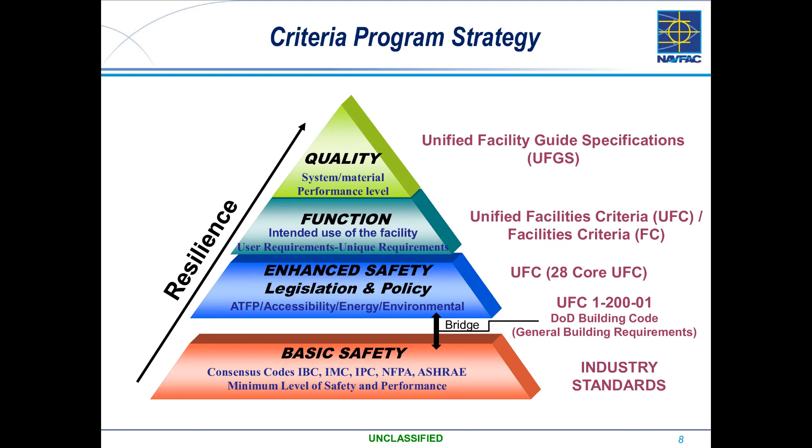The NAVFAC criteria group is part of a tri-service team. We work collaboratively with the Army and Air Force on an installation resiliency function group. This group spearheads some of our resiliency criteria projects across disciplines. Below is a list of our current FY22 and FY23 planned projects.

This next year, we have a significant focus on microgrids for energy resilience. We're about halfway through our microgrid UFC development, and we'll be working on battery storage, controllers, commissioning projects for FY23. Cyber is also a concern we're working on for UFC, which includes the development of a communications facility UFC, which will help make our facilities more resilient.

We are increasing our natural infrastructure criteria through the development of a new UFC that will have a design focus and will be complementary to the climate change planning handbook used by our Navy planners. This effort also involves collaboration with the Army Corps of Engineers Engineering with Nature program.

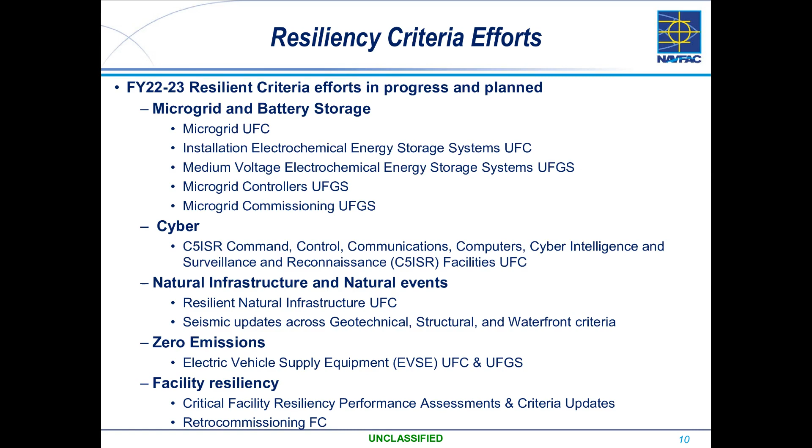Finally, the Navy has an inventory of aging infrastructure. Past events have shown that our aging infrastructure is at greater risk than our newer construction. We have projects in place that will look more deeply into the performance of existing critical facilities and look into ways of increasing resiliency. Next slide, and we're going to go over to the planners.

Good morning, this is Nate Manning at NAVFAC Atlantic. Resiliency and planning criteria. We've had some recent updates to planning criteria in 2 DoD Unified Facilities Criteria documents, specifically UFC 2-100-01 Installation Master Planning or Comprehensive Planning, and also the 05N or Facility Space Planning for Navy and Marine Corps installations.

UFC 2-100-01 Installation Master Planning, 10 U.S. Code 2864, requires master planning for military installations, but also addresses energy and climate resilience, transportation, and installation resilience components of the master plan. The FY20 National Defense Authorization Act requires climate change effects and considerations be built into the master planning process. Per the law, in the military installation resilience component of the master plan, we utilize the NAVFAC Climate Change Planning Handbook for installation adaptation and resilience. The NDAA requires the use of the Department of Defense's Regional Sea Level Rise Database and the DoD Climate Vulnerability Assessment Tool for further climate-related analysis.

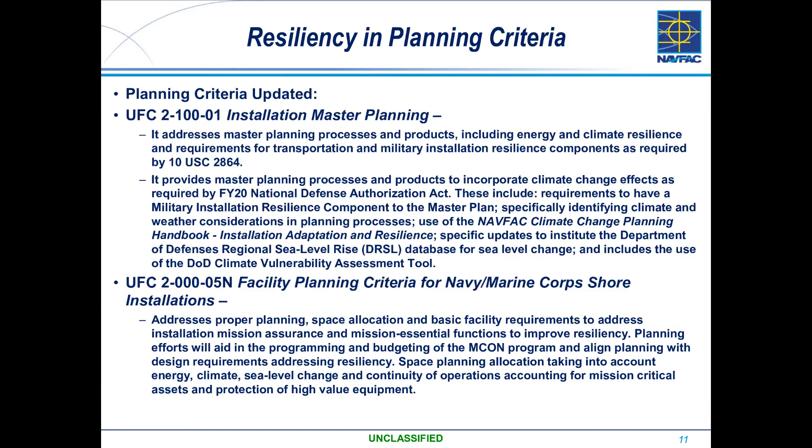In the 05N or Facility Space Planning for Navy and Marine Corps installations, this document addresses the basic facility requirements for mission assurance facilities. Programming projects with resiliency items built into the design protects mission essential assets. Next slide, please.

The DRSL database, or DoD Regionalized Sea Level Change and Extreme Water Level Scenarios, assesses vulnerability and impacts from climate events at locations where DoD has assets currently. The scenarios that are provided are adjusted specifically for each DoD site, so decision makers can make location-specific decisions.

There are 5 scenarios within each time frame: 2035, 2065, and 2100. The end user must go through a series of scenarios to understand any potential change in shoreline or wetland areas. The end user must go through questions like: how impactful is this scenario? What areas are likely to see climate-related implications? And when might it happen?

We are currently developing a decision tree to aid the end user through this process. We also recommend the end user generate maps for sea level rise with storm surge to understand temporary flooding that might occur in a specific location. The DRSL is available currently in data table format. However, NAVFAC is currently transforming the tabular data into GIS to better support decision making.

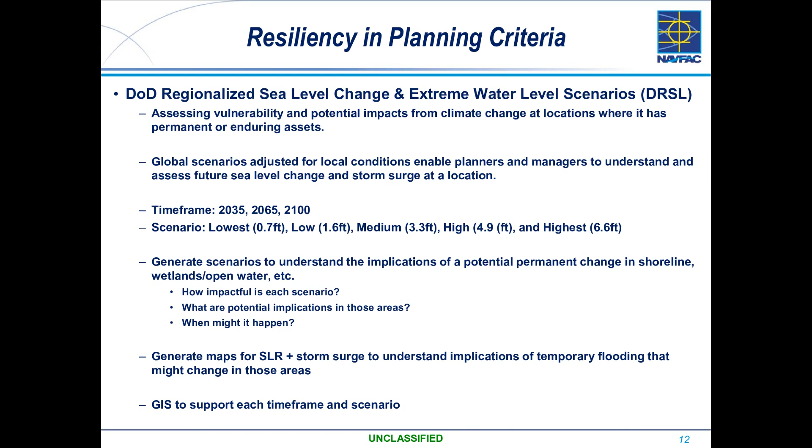Next slide, please. And I'm going to pass it over to Brian Hardman. All right, thank you, Nate.

This is Brian Hardman, and as part of the fiscal year 2020 National Defense Authorization Act, there was the requirement for a new section to be added to the master plan. And the master plan is also called an installation development plan. We do have a consistency guide that goes along with that.

And so those new topics included, for resilience specific: the risk and threats overview, assets and infrastructure, lessons learned, ongoing and planned mitigation projects, outside the installation public or private agreements, and future risk and threats to projects. And so these are all sections that have to be answered by every installation, and it makes them look at what they're doing for these topics and how resilience plays into that.

Next slide, please. And so as it has been mentioned already, there's the Climate Change Planning Handbook, which covers installation adaptation and resilience. This was a 2017 publication that has just recently been given the ability to train the handbook to 8 different regions throughout the world in NAVFAC. And so this is a tool that can be used that shows the impacts on the built and natural infrastructure, and using this planning handbook for the development of tools, looking at adaptation and resilience from that standpoint.

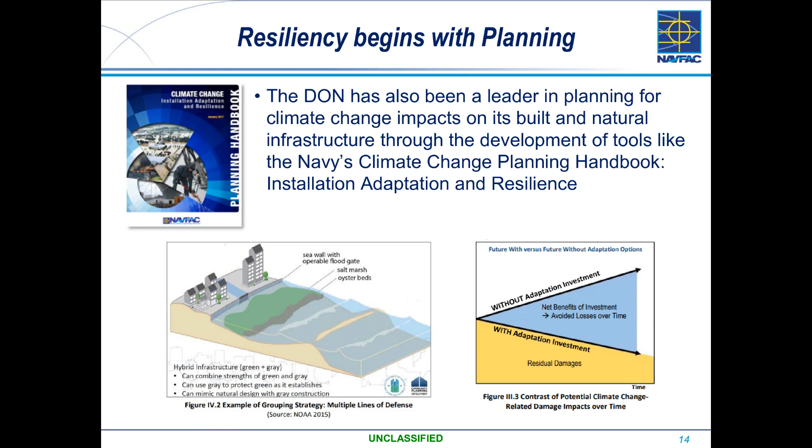Next slide, please. And so as I mentioned, there are 8 trainings located worldwide, and those trainings will be done in 4 stages because the handbook is in 4 stages. So the first one is establish scope and characterize impacts. Stage 2 is identify and screen action alternatives. Stage 3 is calculate benefits and costs of action alternatives. Stage 4 is assemble a portfolio of action alternatives.

And along with that, the appendices also include some topics such as adaptation action alternatives fact sheets. And so those go into a deeper dive into structural adaptation approaches, natural and nature-based adaptation approaches, facility adaptation approaches, and non-facility adaptation approaches.

Then there's another one that talks about the economic analysis tools and resources fact sheets. There are worksheets that every student who goes through the training works through. They all come together and decide what scenario they're going to look at as a group, and the worksheet then goes through stage 1, 2, 3, and 4, so you're able to have an idea of what's going on.

This is helpful when you're planning projects such as MILCONs, because when you're looking at a proposed project, how can the climate change planning handbook play into an alternative? Here's the worksheet that moves you through stage 1 through 4, and you can then have another assessment for that MILCON project.

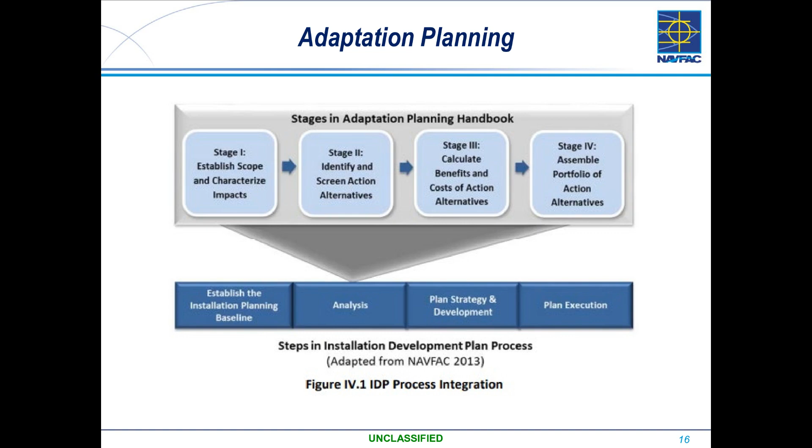Next slide, please. I believe that was my last one. Yeah.

Hi, this is Robert Warren, and I'm going to be talking about developing the sea level rise criteria for civil engineering.

I had the opportunity to work on developing new criteria to implement the DRSL database, which Mr. Nate Manning already gave a brief intro to. For this criteria development process, we focused on tidally influenced areas, and we established default DRSL values in the absence of overriding component policy. These default values were based on the building classification already included in ASCE 24-14, which was flood resistant design and construction, and the risk to the facility.

This revised approach was coordinated with the United States Army Corps of Engineers and the Air Force Civil Engineering community. It implements the FY19 Freeboard Approach, which was another modification we made to the ASCE 24-14 standard, as well as the FY20 approach, which was implementing the DRSL database, requiring some additional modifications to ASCE 24.

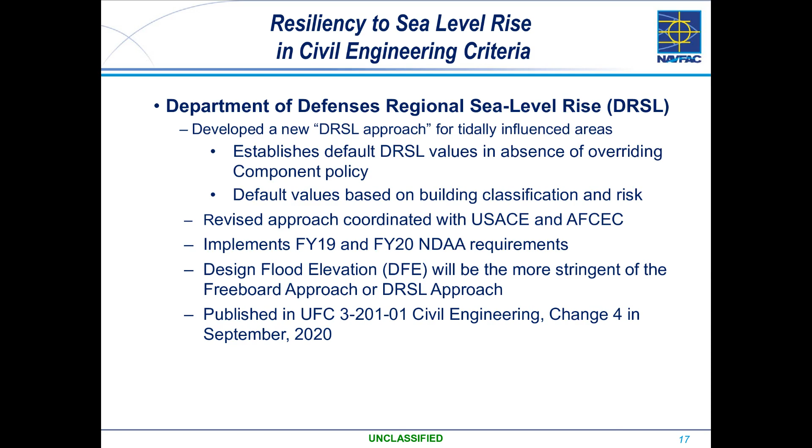ASCE has flood design classes 1 through 4. As part of this criteria development process, we took category 3 and turned it into two categories, a subcategory 3A and a subcategory 3B. That's one of the modifications I was just mentioning.

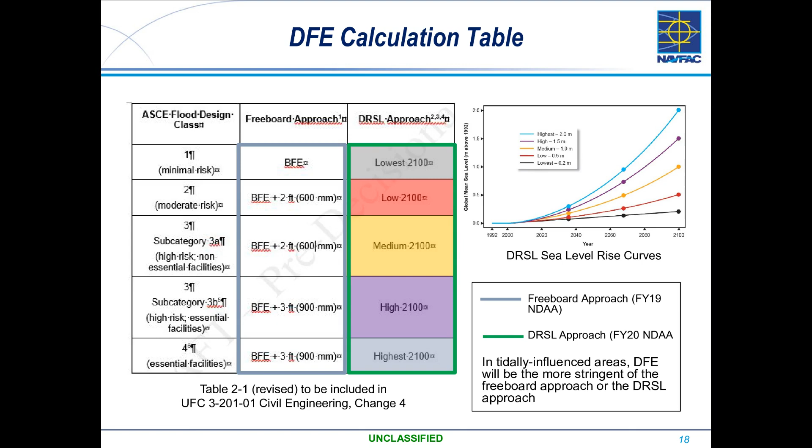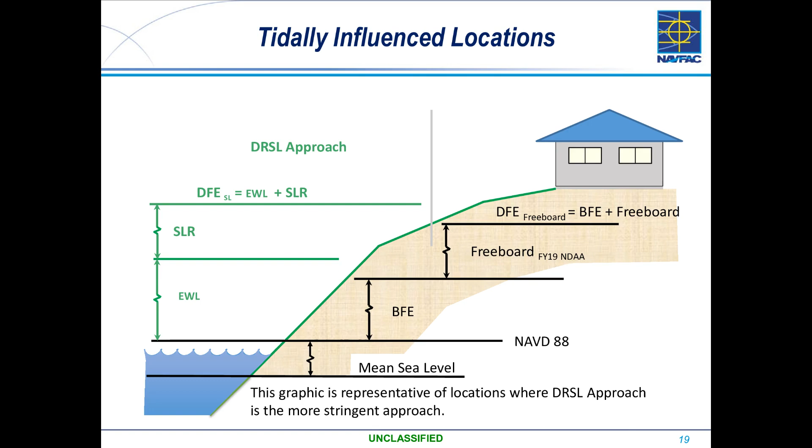Thanks, Rob. I appreciate that. I'm Mike Lewis, landscape architect at Atlantic, and what I'd like to do is talk through using nature-based resiliency engineering design, taking a look at how in the UFC we incorporate it so that our projects, both master planning and environmental restoration, site-specific projects, can be handled and can really set a baseline for what the Navy is looking at doing. We have a few executive orders that we're following.

There are a lot of policies that we're going to be working into these documents, and a lot of cross-business line coordination. I call it integrated design, and it's not just design and construction disciplines, but environmental, energy. There's a lot of opportunities for us, and it's not just the Navy, but it's also the tri-services working together on this.

Let's do the next slide, please. This is an example project that we started. It's at Naval Base Dam Neck here in Virginia. The intent was to do an entry control point for the DevGru compound. It's sited on an existing main drive in, but it is in the secondary dune exposure, surrounded by wetlands and existing development already, so it was something we really had to work with sensitivity to the environment.

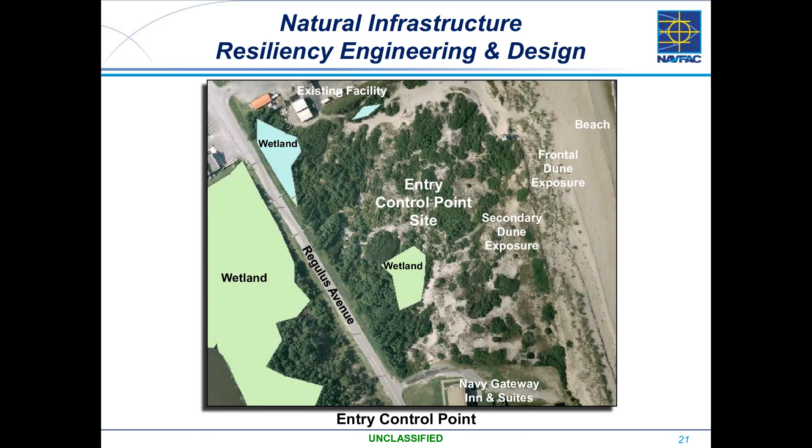You can see on the upper right the beach zone, then going back to the left, the frontal dune, the secondary dune, and where you see the label, the entry control point site was the intent. Actually, originally it started right where the wetland is, right below it, but we were trying to incorporate that as well. We were making adjustments on the site with multiple disciplines, and environmental and security was a major issue as well. Next slide, please.

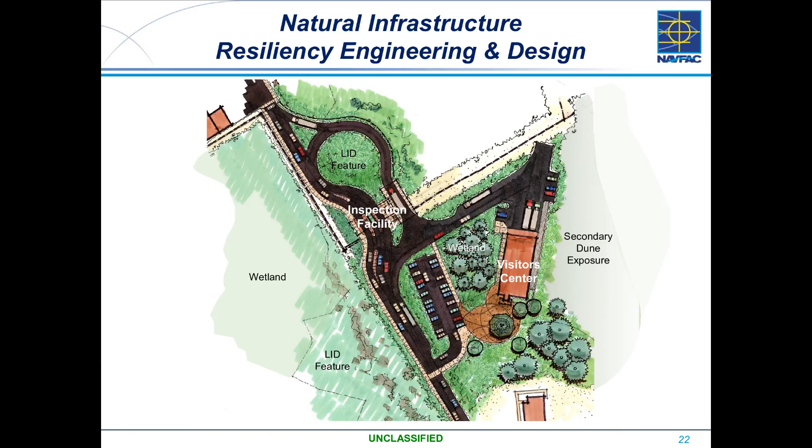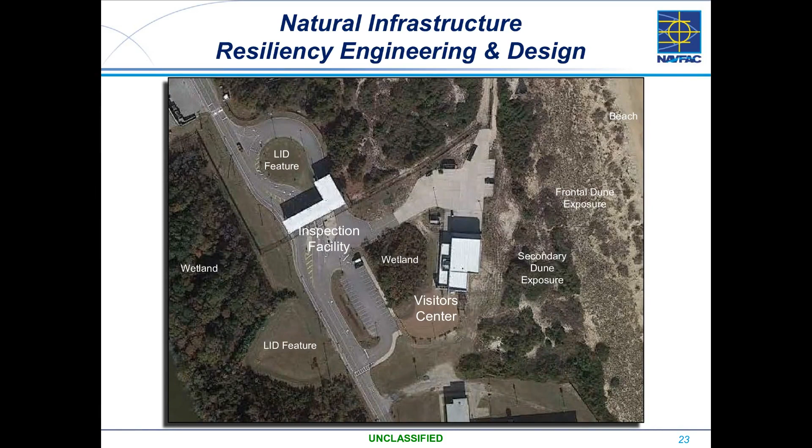But ultimately, I think this is a good example of where we want to head as far as making sure our UFC and some of our other documents include both site-wide and really focus on the site-specific as well. And with that, I'd like to turn it over to Michael to wrap it up.

Thank you, Mike. This is Michael Partica, NAVFAC Headquarters, Public Works Utilities. I'm the MUSE Director and Energy Security Program Manager. So resilient energy, I get to talk about one of the most exciting portions of the entire brief, in my humble opinion. I'll go through these slides here pretty quick and have a couple questions for you, perhaps.

The Department of the Navy will ensure energy resilience for mission accomplishment by deploying cybersecure microgrids or comparable resilient technologies to support its most critical missions. So one of the things I do as an energy security program manager is leverage the mission assurance assessments and work with that team to find and mitigate threats to our energy sources.

The installation of microgrids will leverage carbon pollution-free power generation and long-duration battery storage to the greatest extent practicable for continuity of operations of critical missions. Next slide.

Microgrids for energy resilience. So a microgrid, you have to understand, first of all, what is a microgrid? It's an integrated system of electricity generation, distribution infrastructure, and energy storage required to maintain power while disconnected from the commercial grid.

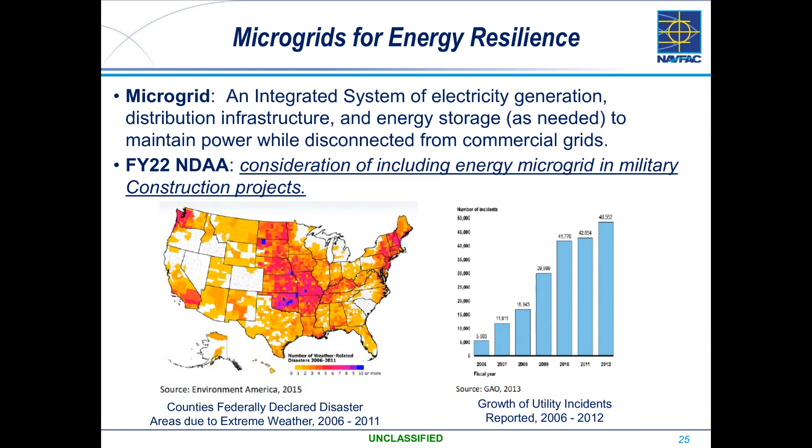We also have an executive order, 14057, catalyzing clean energy industries and jobs through federal sustainability. It establishes that the federal government will lead by example to achieve a carbon pollution-free electricity sector by 2035 and net zero emissions economy-wide by 2050, which sounds like a big deal, and it is a big deal.

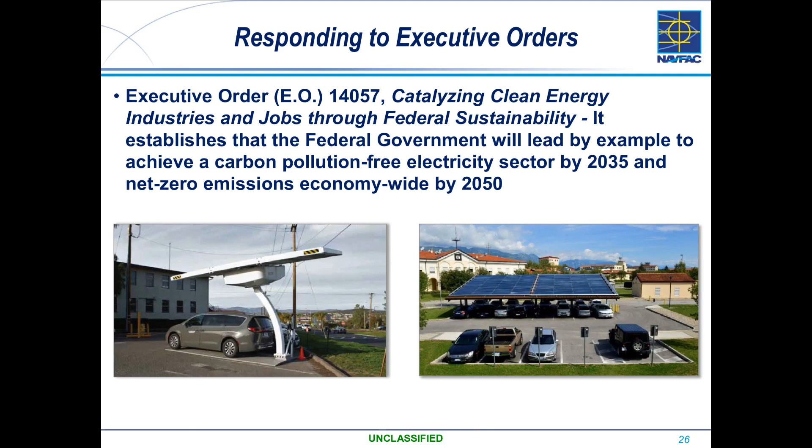But your Department of Defense has developed tools. One of those tools is the Energy Resiliency Assessment Tool that can easily incorporate things such as carbon-free technologies, and incorporating greenhouse gases that help us report for the policies and legislation we have to report upwards on via the annual Energy Management Resiliency Report.

So one of the culminations of what we've done, back in December of 2016, NAVFAC published the P601, which is a microgrid design and reference guide. And now the natural progression is to take that P601 Public Works publication and turn it into a UFC. That's going to provide folks across the tri-services with a basic understanding of microgrid technology and a common methodology to identify requirements and develop conceptual designs.

As part of the energy resiliency assessment tool required for ERCIP programs, that portion of military construction funding, the requirements in these conceptual designs are going to allow us to compare apples to apples and oranges to oranges, and help us make better quantitative decisions in our processes.

Now, previously mentioned was our EVSE, our electric vehicle supply equipment, commonly known as charging stations. That will encompass the conductors, including ungrounded, grounded, and equipment grounding conductors, and the electric vehicle connector, attachment plugs, and other fittings, devices, power outlets, or apparatus installed specifically for the purpose of delivering energy from the premises wiring to the electric vehicle.

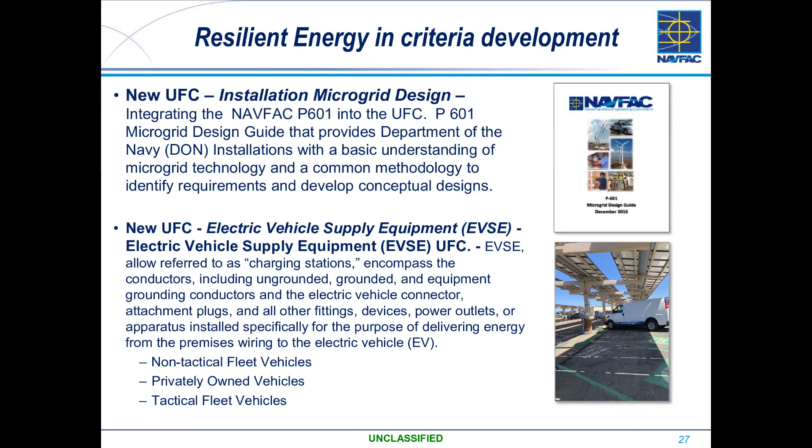But one of the exciting things here is we will have questions, but I'll have one question for you. We talked about climate change, and you heard about water scarcity, high winds, seismic activities, inundation from sea level. But what's one of the new climate mitigation hazards that is becoming prevalent in the news, especially over on the West Coast? I'll give you a couple minutes to put something in chat if you think you know the answer to that. Back over to you.

All right, thank you, Mike. Always great when we can turn the tables a little bit and ask some questions for the audience instead of them asking us. So with that, we are about to start the Q&A session.